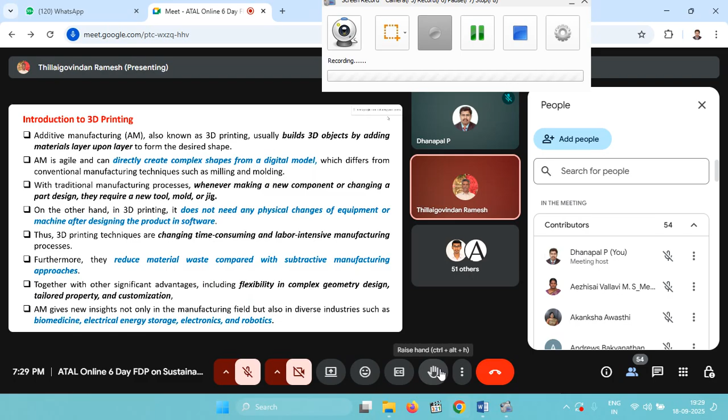So AM gives new insights not only in the manufacturing field but also in diverse industries such as biomedicine, electrical energy storage, electronics, and robotics. Now there are printers used to print biomedicine, like drug delivery systems, and electrical energy storage. Printing of electronic components is the talk of today. Flexible electronics is a challenging area now for 3D printing.

I'll just rush through these slides because I don't need to share additional information on how printing is possible in 3D printing, what is the anatomy of a 3D printer, and what is the main part behind this technology, like the extruder, filament extruder, or laser, whatever it is.

Additive manufacturing technologies are one of the most promising areas in the manufacturing of components. This enables the manufacture of a large range of prototypes or functional components with complex geometries, such as those obtained from topology optimization processes or generated from a fitting process in Computer-Aided Design.

Now, the topology optimization technique is playing a vital role in optimizing the shape of the object before it goes for any conventional applications.

A very good example is a cycle frame. We used bicycles in our olden days with triangular shaped tubes, connected in a triangular shape. Now you can see how the size and shape of cycle frames have evolved. These are all identified based on the technology called topology optimization, where material saving without compromising the stresses or strain developed in the material is the motivation behind this technology.

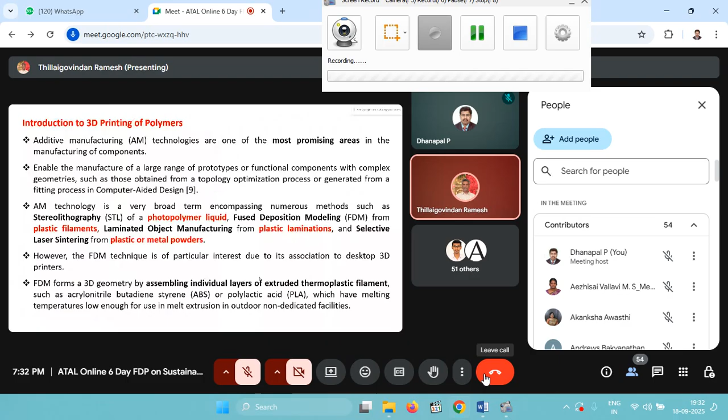However, the FDM technique is of particular interest due to its association with desktop 3D printers. FDM forms a 3D geometry by assembling individual layers of extruded thermoplastic filament such as ABS or PLA, which have melting temperatures low enough for use in melt extrusion in outdoor non-dedicated facilities.

Additive manufacturing, commonly known as 3D printing, refers to a process of creating three-dimensional objects layer by layer from a digital model, CAD, computer design. Unlike traditional subtractive manufacturing methods that involve cutting away material from a larger block, additive manufacturing builds up the object progressively, typically using materials such as polymers and metal.

I think almost all categories or classifications are done with the help of this particular technology. Polymer is possible to print. Metals are also possible to print. Ceramics - we are developing a technology for printing ceramics, composites, or even clay models are now printed with the help of 3D printing technology.

This technology has found applications across various industries, including aerospace, automotive, healthcare, consumer goods, due to its flexibility, cost effectiveness for low volume production, and potential for rapid prototyping. I recently bought a Creality printer at a cost of only about 15,000. With the help of that particular component, it is possible for me to print whatever design I have in mind to convey to the students.

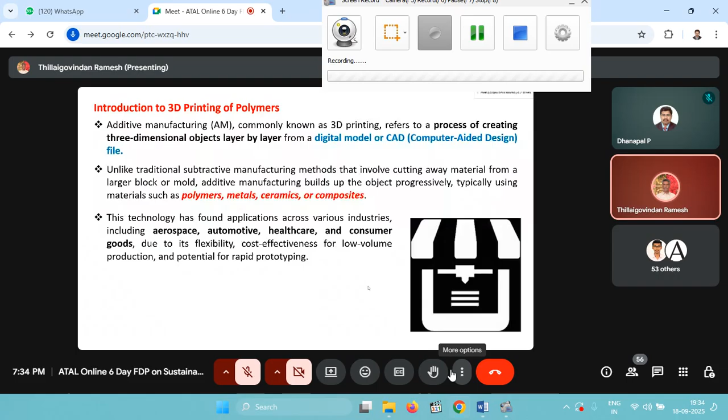Especially with polymers, I have taken a small example from this source, HexPEKK, which is a company that develops parts for automobile industries. You can see the first picture, like shape optimized brackets - you just think about what manufacturing method, a conventional method, could be used for this.

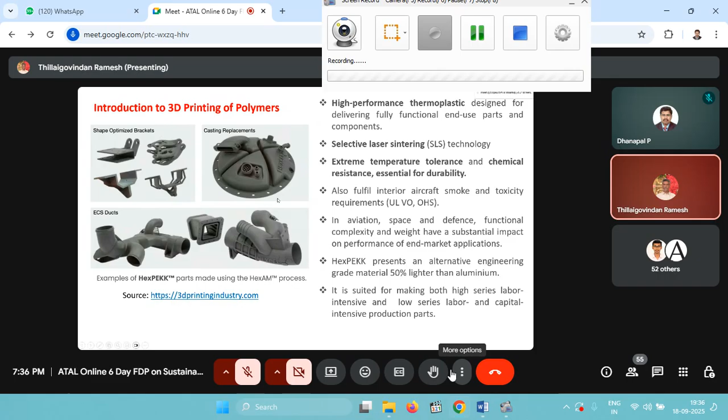Then this is a casting replacement, and we have an example of ECS for automotive applications. These are all other examples printed with the help of different materials.

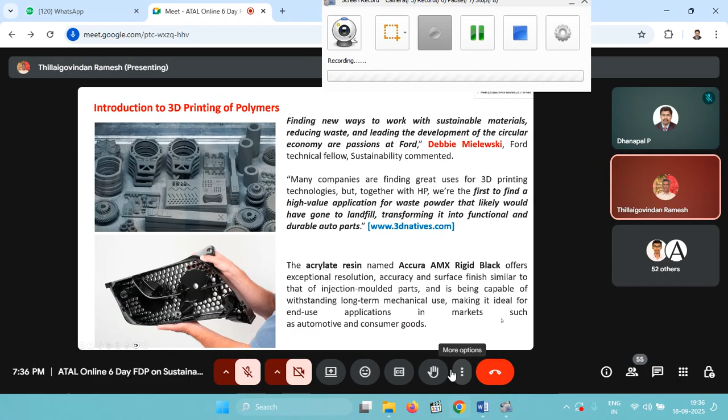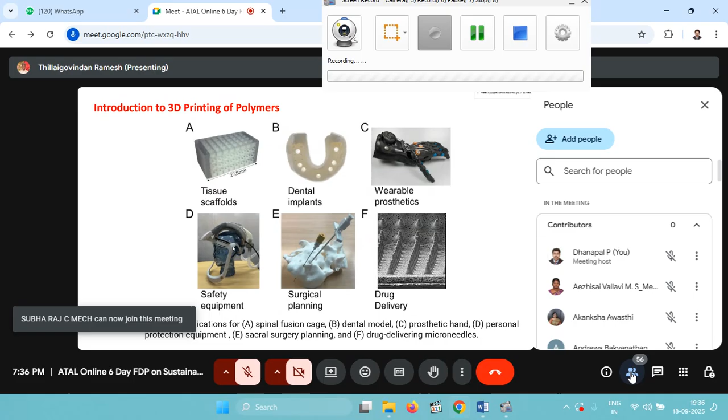Even which is possible to print a layer of few microns, say 1 or 2 microns thickness, by which it is possible good strength can be achieved, etc.

A few examples of medical 3D printing applications: this is a spinal fusion cage, and this is a dental model, a prosthetic hand - a wearable prosthetic hand, safety equipment, surgical planning, how to perform surgery before going for an actual surgery.

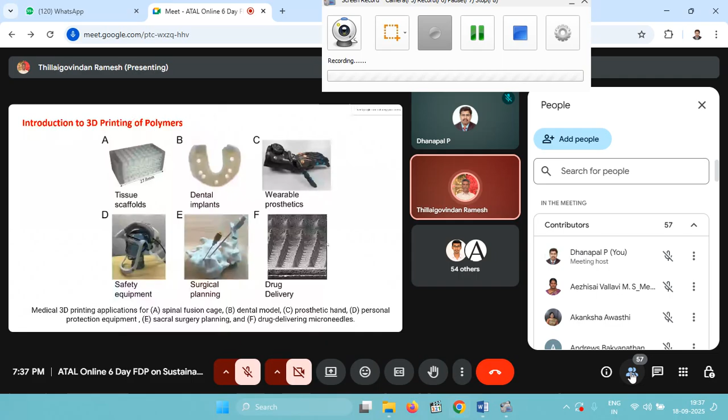Then drug delivery system - these are needles. When these needles are dipped in medicine, due to capillary action, the medicine will suck in, and then when it is pressed against the skin, because of the pressure difference, it will deliver the medicine. So normally we call it drug patches. Drug patches used for external applications - you can stick them on skin wherever you require the drugs. It is printed through 3D printing. Normally we call it drug delivering micro needles.

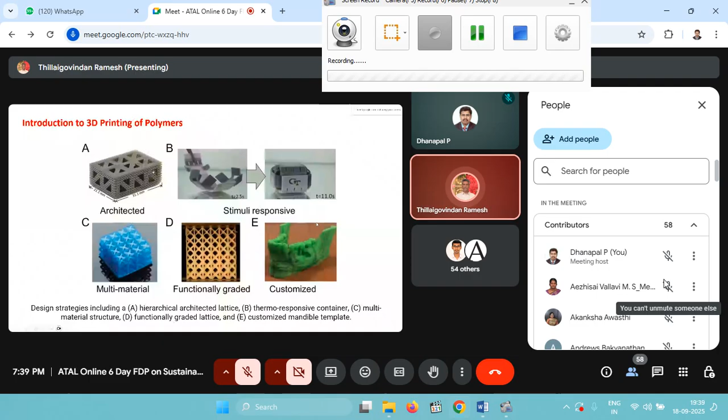It's a container, so if the size is very small, I can fill the drug inside and send it inside the body. Based on the body temperature, it will open up and release the drug, and this material will be degraded automatically in the body itself. That's also possible, and these are printed by means of 3D printing - see the structure, it is gradually varying in order along a particular direction. And this is a mandible template for learning purposes.